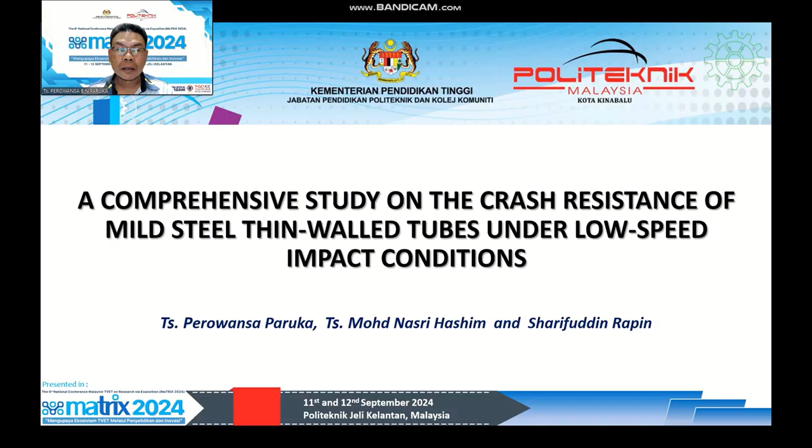We are delighted to present our work titled A Comprehensive Study on the Crash Resistance of Mild Steel Thin-Wall Tubes under Low Speed Impact Conditions. Introduction. In this section, we will introduce the fundamental aspects of our study.

Steel, as we know, is an alloy composed of iron and carbon. It is renowned for its mechanical properties such as strength and fracture resistance, which make it a preferred choice in engineering applications. Among the many types of steel, mild steel stands out due to its high strength, stiffness, and lightweight properties, making it ideal for structures that require efficient impact response.

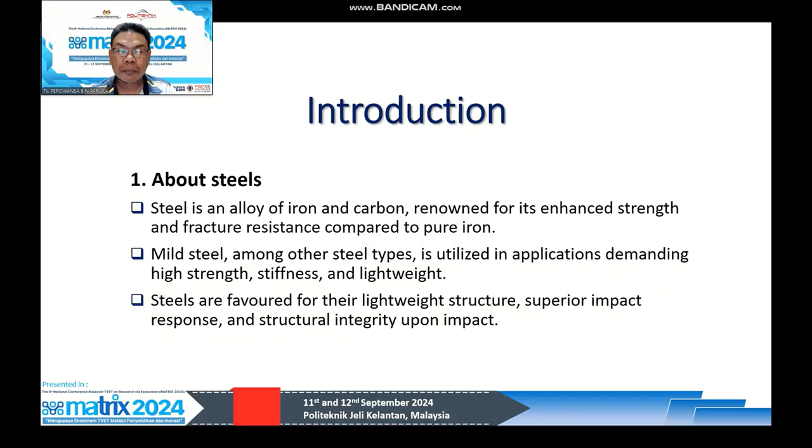The core objective of our research is to evaluate the crashworthiness of mild steel thin-wall tubes, focusing on their behavior under axial loading conditions. Specifically, we investigate various cross-sectional geometries, specimen length, and their corresponding energy absorption characteristics.

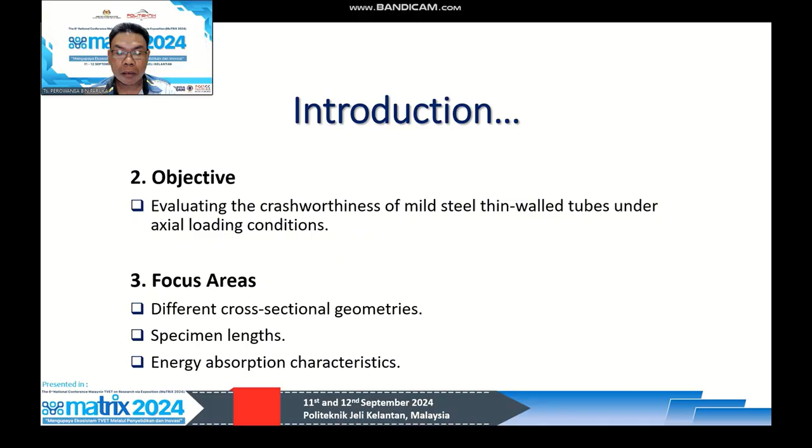To elaborate further, this study emphasizes three key focus areas. Number one, we explore the structural influence of circular and square cross-sectional tubes. Number two, the length of each specimen is standardized at 120 mm to maintain consistency across all tests. And number three, understanding how these thin-wall tubes absorb energy during axial compression is critical for improving crash safety design.

Physical or experimental tests. Moving on to the experimental setup, we employ a low speed impact testing method at 2.75 mm per minute to simulate crash conditions. The tests were conducted using an Instron machine with a 100 kN load capacity fitted with a 200 mm diameter platen impactor that complies with ASTM 3763 standards.

The clamping system was designed to provide coaxial alignment within the upper and lower rigid components, ensuring the specimens were properly secured for accurate testing. The support region had a diameter of 120 mm, matching the specimen dimension.

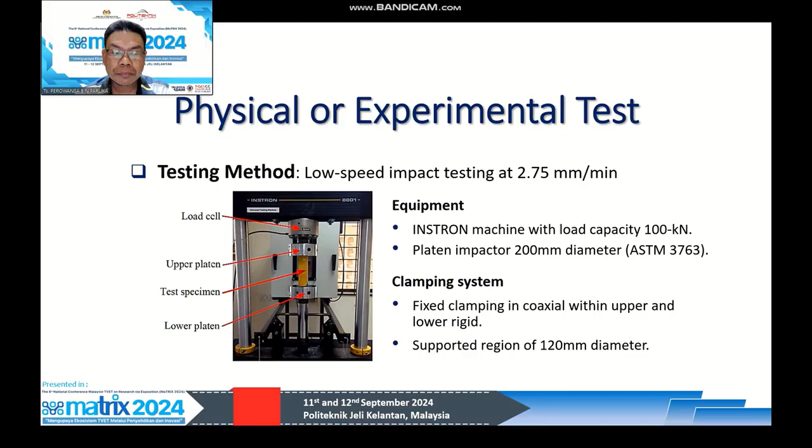Specimen materials. The material used for the specimens was sourced locally and comprises Q235 mild steel. Two types of geometries were tested. First one, columnar tube. This had a square cross-section measuring 40 mm across. And another one, cylindrical tubes. This had a circular cross-section with an outside diameter of 37 mm.

Both types of tubes had the same length of 120 mm and a thickness of 1.5 mm. This uniformity ensured that the differences in crash performance were due solely to geometry rather than material or size variation.

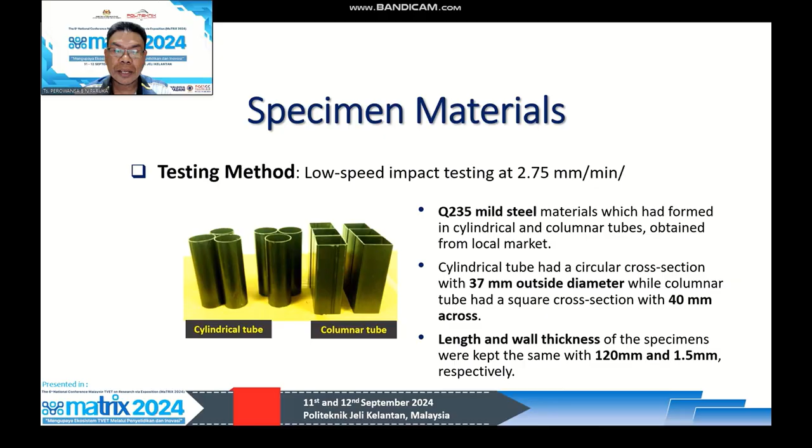Key parameters. To assess the crash performance of the thin-wall structure, we focus on 5 key parameters. Number 1, maximum crushing load, meaning the peak compressive force before plastic deformation. Number 2, total absorbed energy, meaning the total energy consumed during deformation. Number 3, average crushing load. This represents the average force experienced during the compression process.

Number 4, crushing force efficiency, meaning the ratio of average to maximum crushing load, indicating energy absorption efficiency. And number 5, specific absorbed energy, meaning the amount of energy absorbed per unit mass, which is crucial for assessing material performance in lightweight applications.

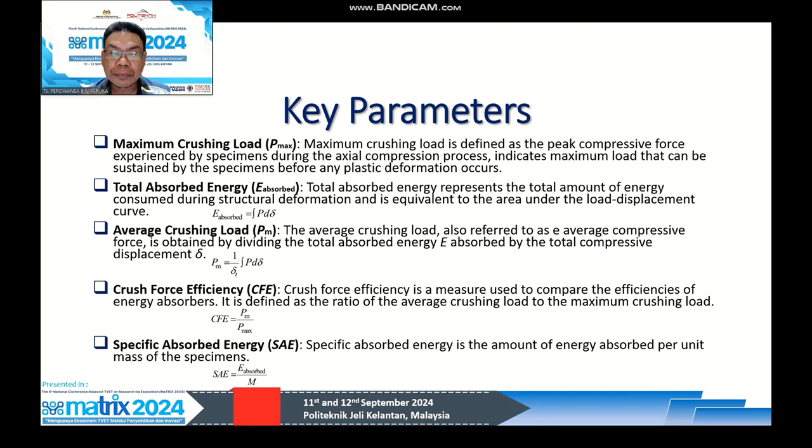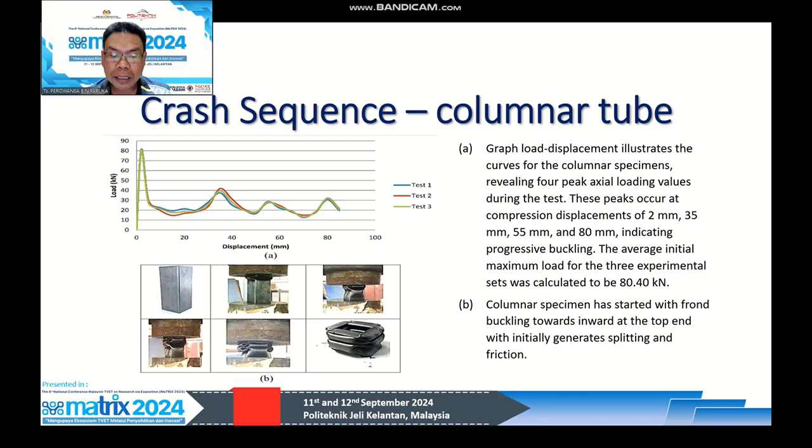Crash sequence, columnar tube. The crash sequence for the columnar tube, illustrated by the load displacement curve, shows 4 peak axial loading values at compression displacements of 2 mm, 35 mm, 55 mm, and 80 mm, indicative of progressive buckling behavior. Initially, the specimen exhibits front buckling with inward deformation at the top, followed by splitting and friction generation. This behavior is characteristic of square cross-sections under axial loading, and it highlights how geometry influences buckling patterns and energy absorption.

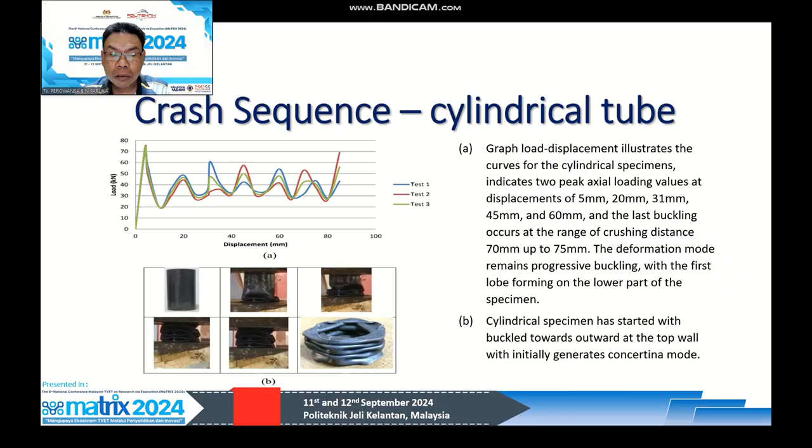Crash sequence, cylindrical tube. In contrast, the cylindrical tube exhibits distinct axial loading peaks at displacements of 5 mm, 20 mm, 31 mm, 45 mm, and 60 mm, with the final buckling occurring between 70 mm and 75 mm. The deformation mode remains progressive buckling, but unlike the columnar tube, the first lobe formed at the lower part of the specimen. This sequence initiates a concertina mode of buckling, where the material folded outward, demonstrating the influence of the circular cross-section on deformation pattern.

Crashworthy capacity. Our analysis revealed distinct differences between the two specimens. First one, cylindrical tube specimen C120. This specimen had a lower maximum crushing load of 72.40 kN, but a higher average crushing load of 37.54 kN and a superior crushing force efficiency of 51.80%. The specific absorbed energy was also higher at 11,349.46 joules per kilogram.

The second one, square tube or columnar tube specimen S120. It achieved a maximum crushing load of 80.4 kN with an average crushing load of 23.44 kN and a crushing force efficiency of 29.15%. The specific absorbed energy was measured at 10,789.66 joules per kilogram. This result indicates that the cylindrical tube performed better in terms of energy absorption despite having a slightly lower maximum load capacity.

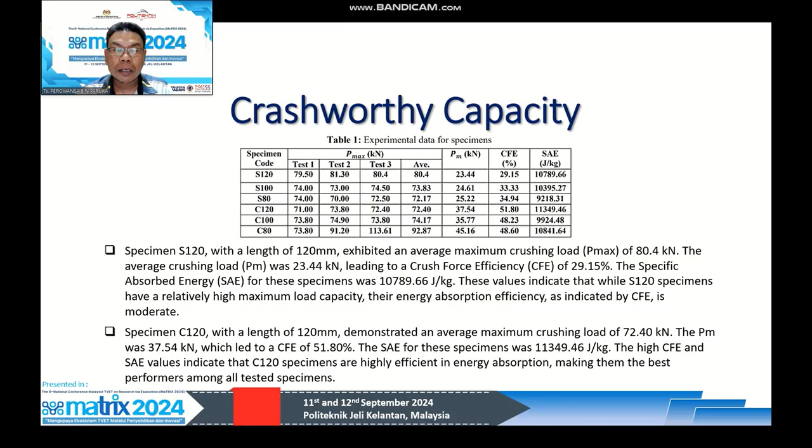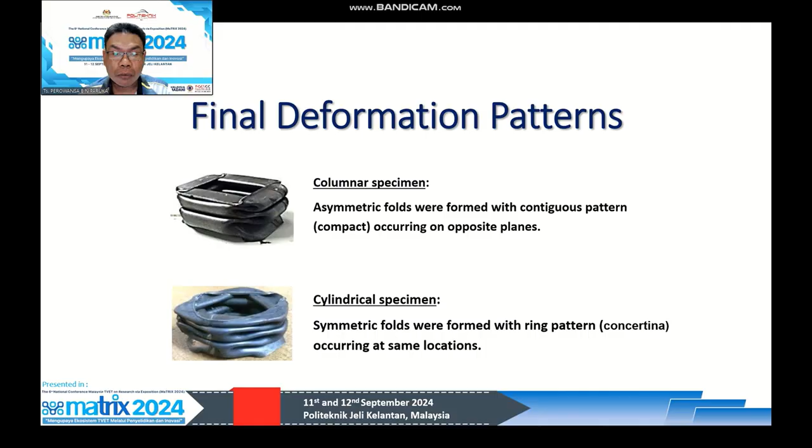Final deformation patterns. Finally, the deformation patterns observed were quite distinct. Looking at the columnar tube specimen, these form asymmetric folds in a contiguous or compact pattern, often occurring on opposite planes. While looking at the cylindrical tube specimen, these develop symmetric folds with a concertina or ring pattern forming at uniform intervals. Understanding these deformation patterns is critical for designing materials and structures with improved crashworthiness.

Summary and future work. To conclude, our study highlights the superior energy absorption capacity and crashworthiness of the C120 cylindrical tube thanks to its high crush force efficiency and specific absorbed energy values. For future research, we propose expanding our investigation by testing under different loading conditions and exploring alternative materials and geometries. This will further enhance the crash performance of thin-wall structures in real-world applications.